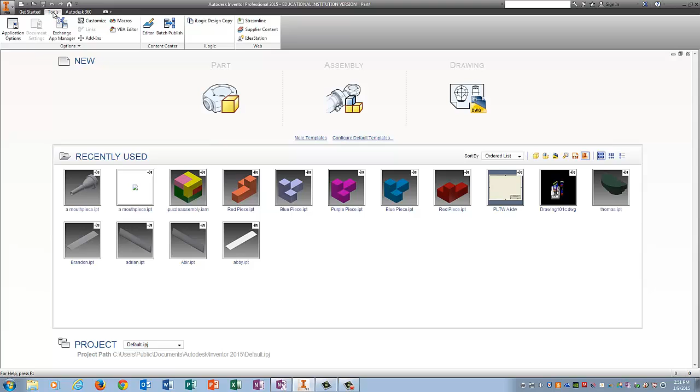If you want, go to Tools, Application Options, and there are a whole bunch of color options you can use. I'm going to change to deep blue so you can see the parts on the screen a little better than the gray on gray.

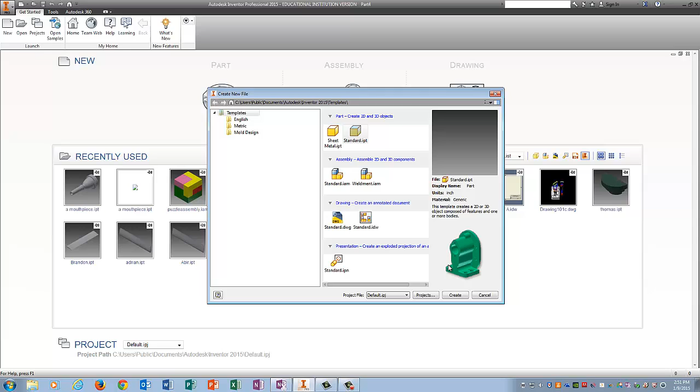So go back to Get Started, go New, and we're going to pick Standard IPT. As always, we go Home first, go to the plus sign next to Origin and pick our plane. I'm doing number 1 on the exercises I gave you, and for this exercise I'm going to pick the right-hand plane, which is YZ. I'm going to do Start 2D Sketch.

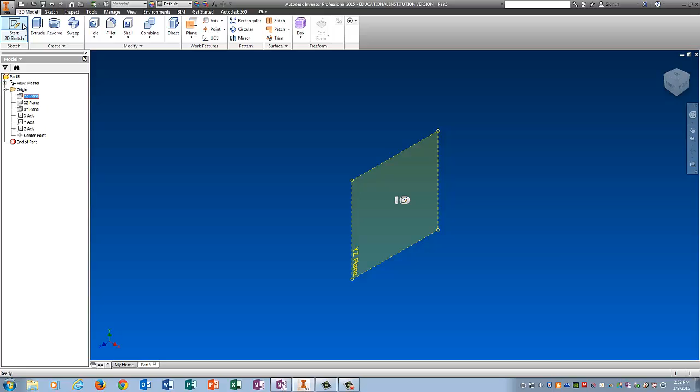I'm going to use rectangle to make a rectangle because it's a lot easier than drawing 4 lines, and I work smarter, not harder. The width of the side view is 1.5 and the height is 1.5.

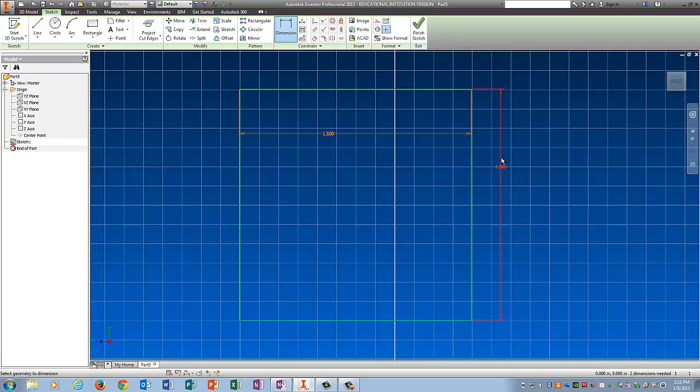And finish the sketch. Now I'm going to add the third dimension, which is 2.25, because that's the overall width of the object. And I have myself this nice little rectangular prism right there.

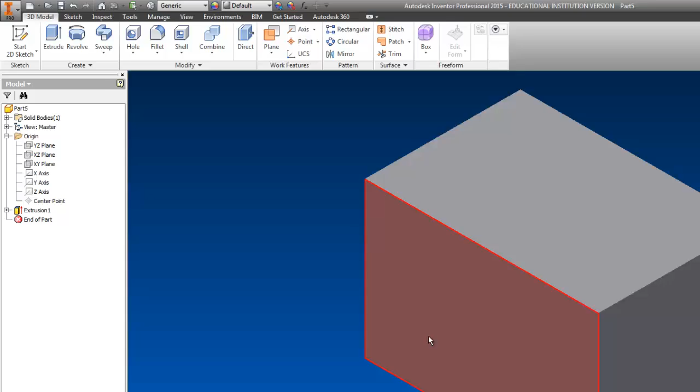I'm going to click Start 2D Sketch, and I'm going to sketch this U on the front so that I don't have to outline it. If you go to Project Geometry and pick Project Cut Edges, it will outline it automatically for you.

I'm going to click Line, and I'm going to start above it, because it's always better to trim lines back than try to guess if you stopped in the right spot. So I drew my U, and now I'm going to click Trim, and snip these little lines away, and now I'm going to dimension.

The problem tells me the distance here should be 0.5, and the distance from here to here should also be 0.5. I'm going to click on the bottom line and the green line, and the distance at the bottom should be 0.25. Then I'm going to hit Finish Sketch.

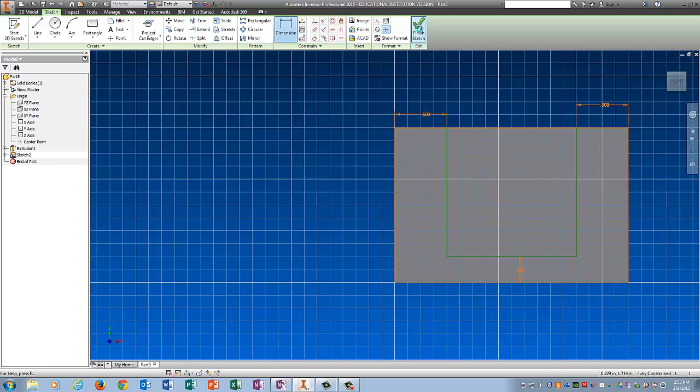And now you can see my U outlined in green and orange. I'm going to click Extrude. I have to pick the profile I'm going to work with, so I'm going to pick this profile right here. Over here, this is the extrude you guys are used to using.

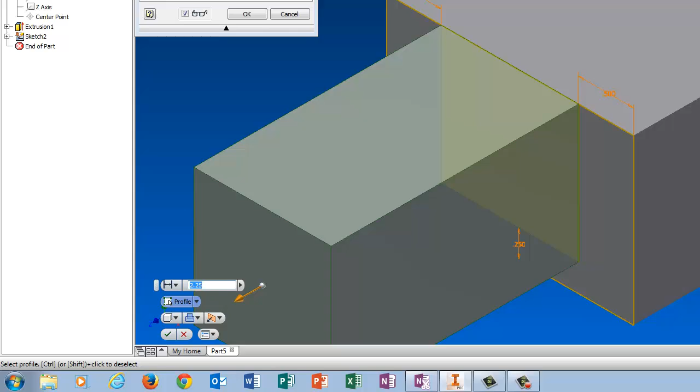I'm going to switch to this one, which is cut. The second option will take the material away instead of adding it. And I am going to make this cut back 1 inch.

So now I have the basic shape that I need. The only thing I'm missing is there's a diagonal line that goes here. So I'm going to click Start 2D Sketch.

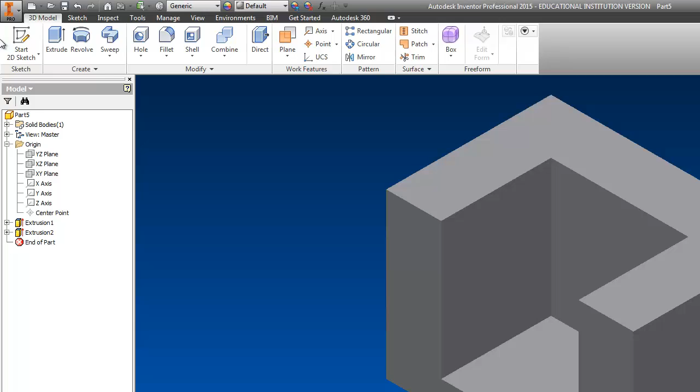I'm going to click this surface, and I can't see it when it lays it flat, so I'm going to click the Home button, and now I can see the surface I'm sketching on. Once again I'm going to click Project Cut Edges, then click Line, and join the corners together.

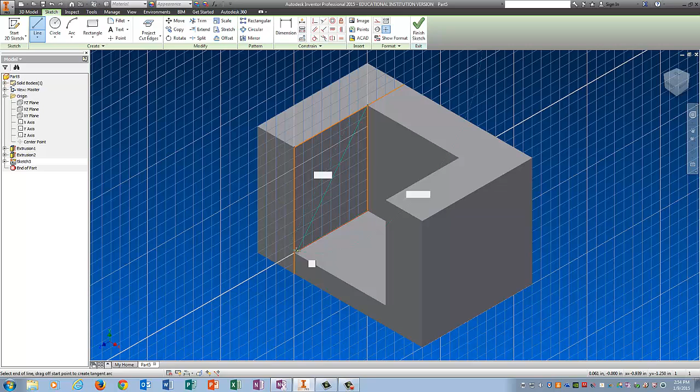I'm going to finish the sketch, and extrude this part over. The distance I need to go is 1.25, because the overall distance is 2.25 minus 0.5 for each side, which of course is 1. So there you go.

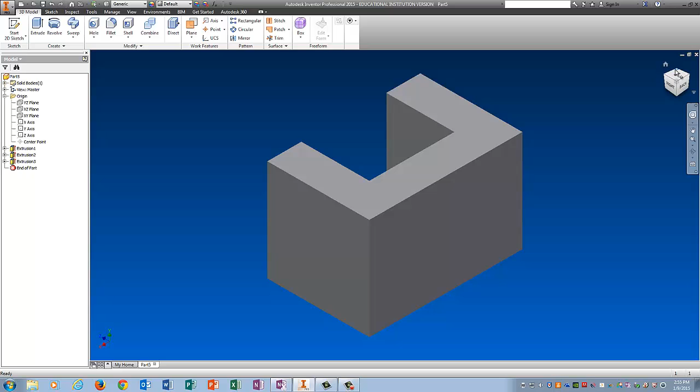There is number 1 for you. I'm going to put a nice little color on it by going to Default, and we'll make this one light red. Well, that's hideous, isn't it?

Okay, the next step is to save it. Click on the eye, Save As. On your desktop, I want you to make a folder. This icon right here says Create New Folder. If you haven't already made a folder, click that and name it Practice.

In the Practice folder, name this number 1, or come up with a creative name for it, like Things She Made Me Draw. I don't really care. Hit Save.

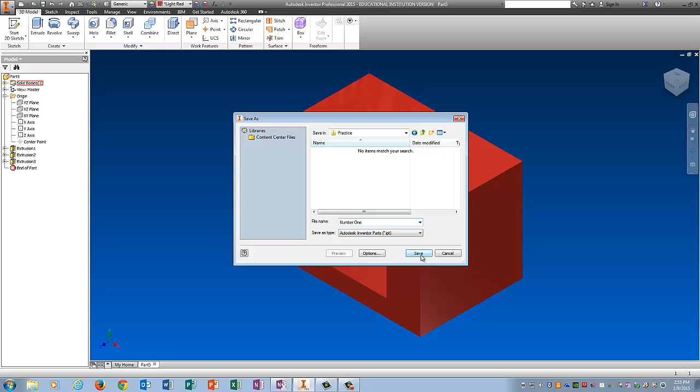Okay, so now I'm going to put this on the IDW, which is the orthographic drawing with the little ISO at the top. So I'm going to click on the eye, go New, and pick PLTW A and Create.

I'm going to type in the project name as Practice. I'm going to put in your name, my name—put in your own name, please. I'm going to put in the date. And the file name, you can name it number 1. Tell it OK. Tell it OK.

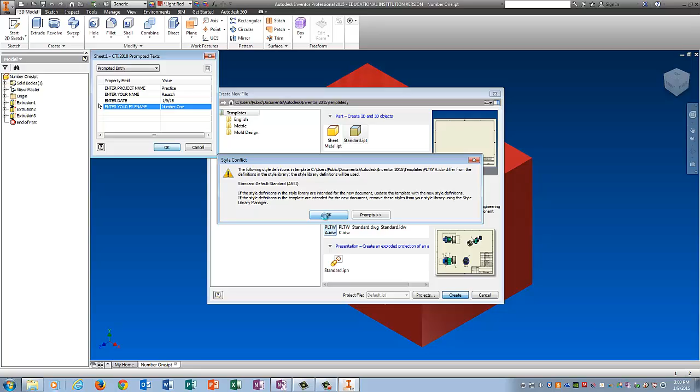And now we are in the IDW file that you guys should be pretty used to looking at. Click on base. It should already have the part file right here. Tell it OK. Click, that's the front view. Click the top view, the side view, and the ISO.

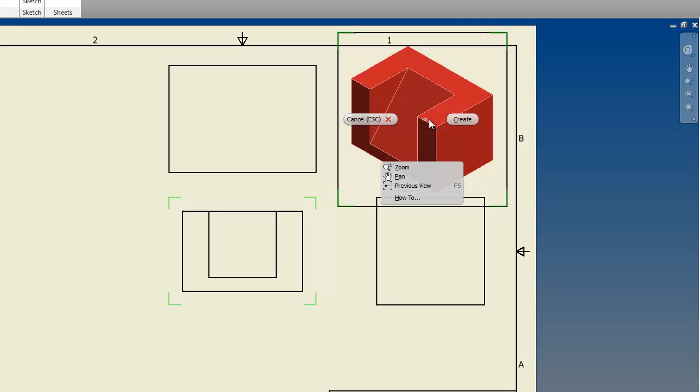Right click, create, turns the boxes into what they need to look like. Pull them apart so they look a little pretty. Don't let them float away from each other too much. Bring this guy away from the border. Double click on him. Give him some color. Save it and print it to the 5430.